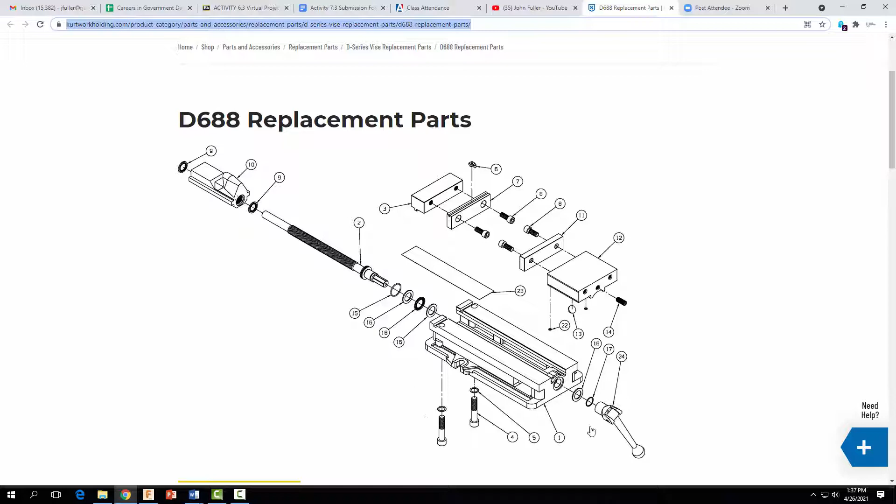Hey everyone, welcome back. In this video tutorial, I'm going to show you how to create an exploded view of the Kurt D688 Vise. If you go to their website, you can see the exploded view of the vise in case you need to order any replacement parts.

Alright, so let's come on back to Fusion 360. Once you have the vise assembly open and you're ready to go, the first thing you want to do is come over to your workspace and change it from design to animation.

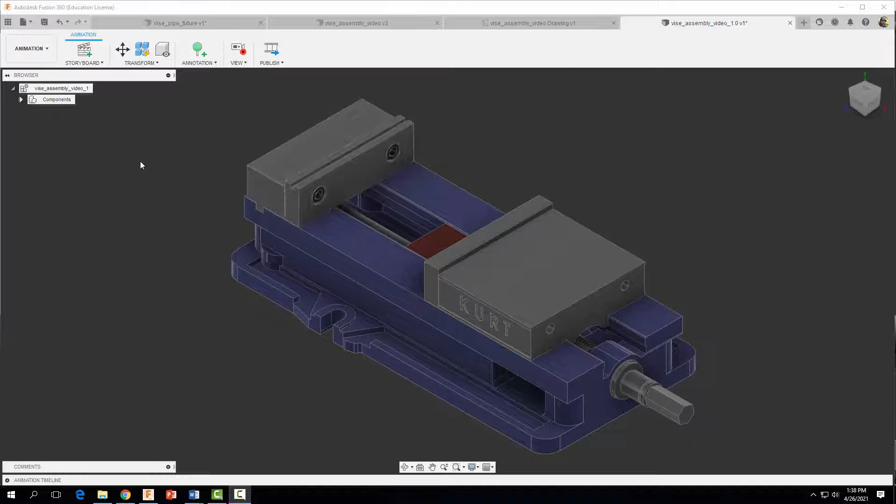The first thing we're going to do is take off the top here of our vise, the jaws, the jaw plate, and the bolts. To do this, I'll hold down Control and click on the two bolts, the jaw plate, and the jaw. I'll click Transform and move it up about 2 inches. Go ahead and select OK.

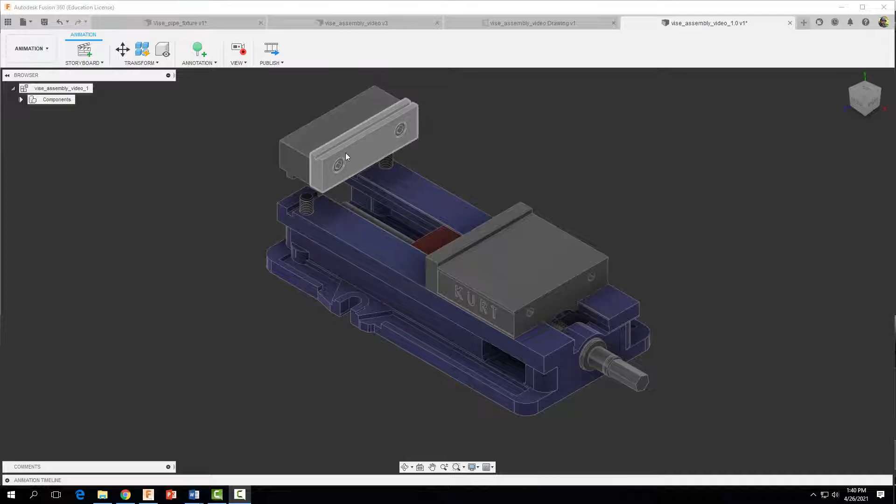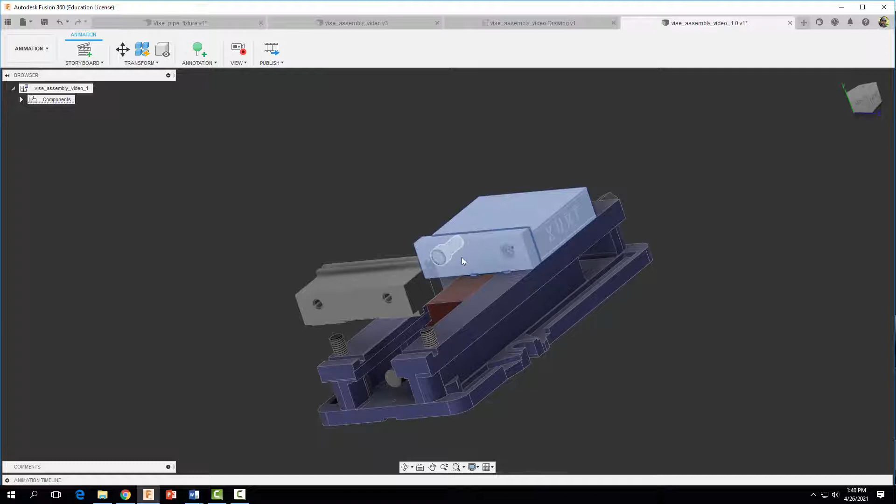Now click on your screen, and let's repeat this process for the movable jaws here on the vise. I'll hold down Control, click there, hold down Shift and my mouse wheel and rotate the part around with my mouse. Press Control and click on those two bolts, then come over to Transform and move this part up 2 inches as well. Type in 2, select OK.

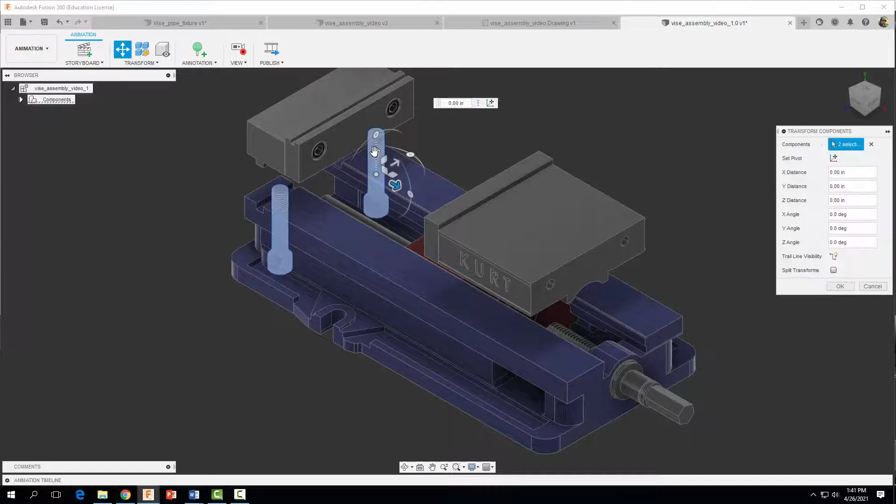Now we're going to take out the two bolts here that hold our fixed jaws in place. I'll hold down Control, click there and click there, then hold down Transform and move them down so that they're out of the vise. I'll make sure they're adequately far enough here, so I'll just type in -4. That should do the trick. Go ahead and select OK.

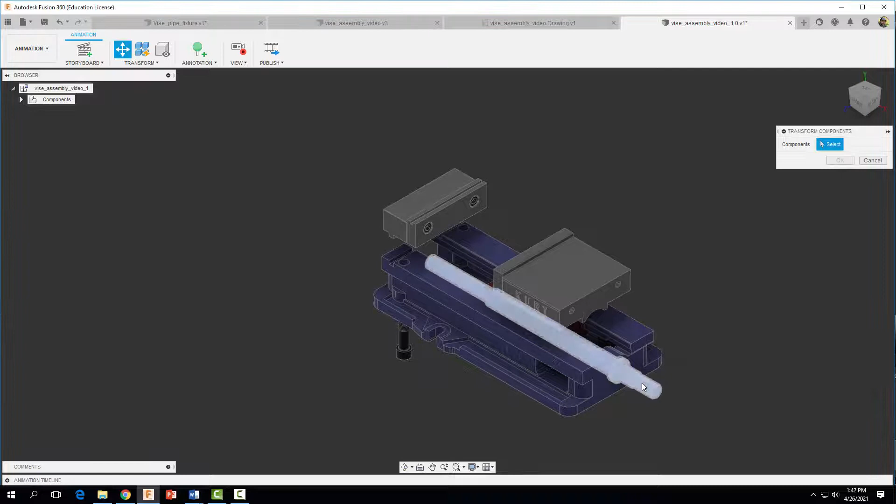Now I'm going to zoom out here and remove the lead screw. I'll click on Transform, click on my lead screw, and pull that guy out a sufficient distance. I think -20 should do the job. Select OK. Let's do the same now for the lead screw nut here, which screws into this, and pull it out. I think -32 inches should do the trick. Go ahead and select OK.

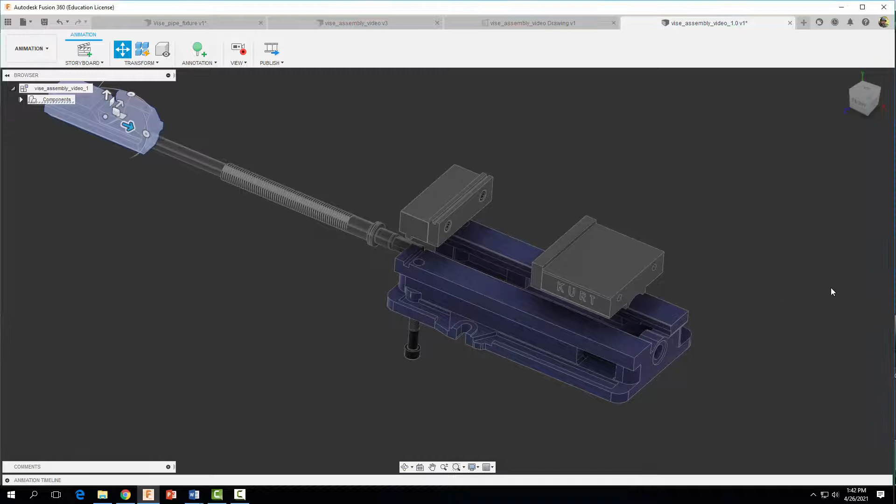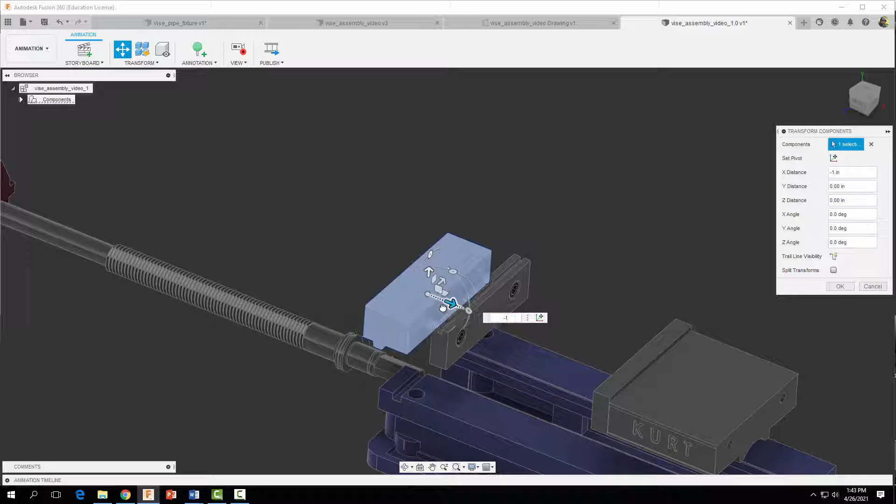Alright, looks pretty good. Now let's go ahead and start taking apart our vise jaws here. I'll do the fixed portion of the jaws first. I'm going to zoom in, click on Transform, click here, and move this guy out a distance of maybe -1, should do the trick. 1 inch. Okay, and I'll do the same for this side. Move it over 1. Click OK.

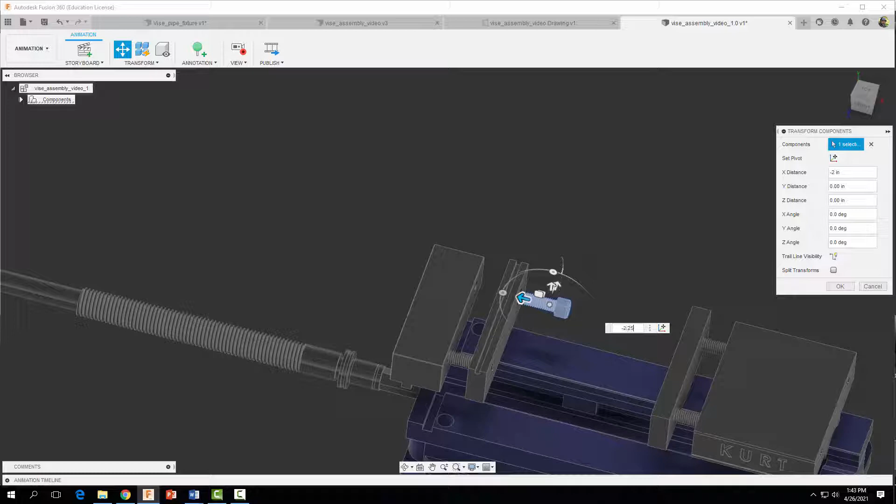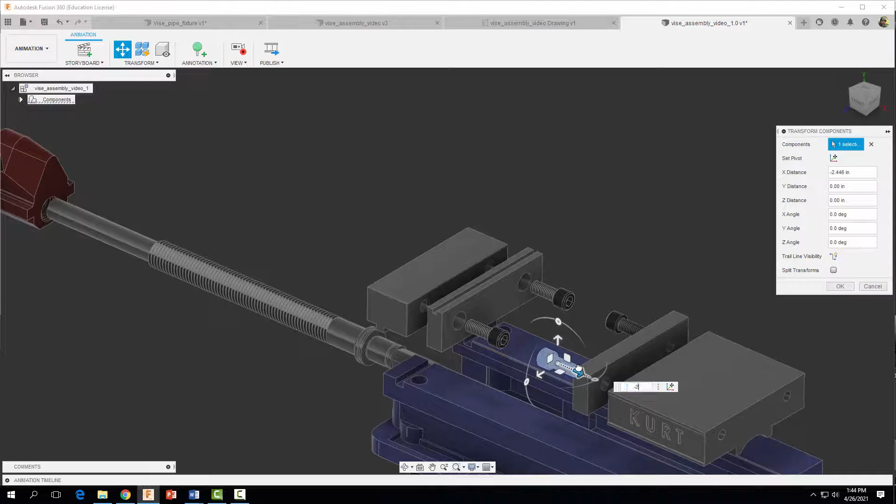Now I'm going to move the bolts out here. Transform, click on that guy, move it out. Let's see if -2 is enough, and let's go with -2.25. Let's do the same for this one. -2.25. Same for this one. -2.25. Click here. And -2.25. Select OK.

And there we have it. Our vise is pretty much completely taken apart.

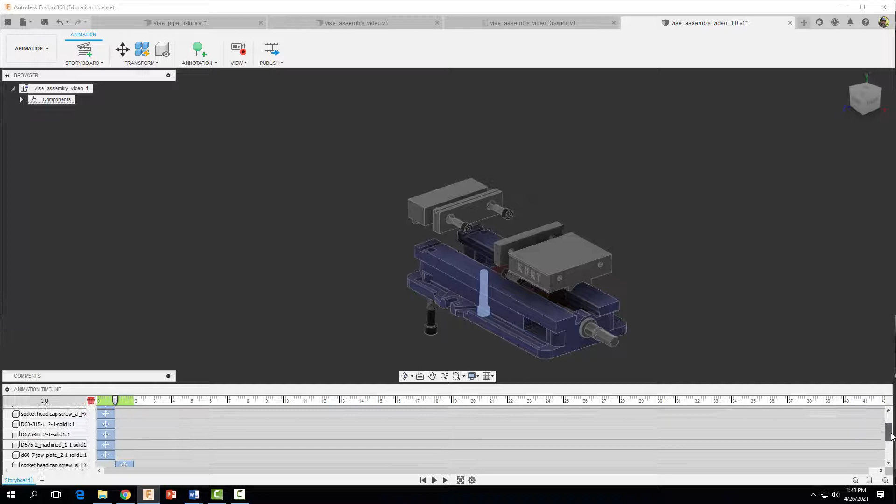Alright, so now that that's done, I'm going to come down here and expand my timeline, and stagger these so we get a nice animation of our vise being taken apart. The first thing I want to do is make it appear like these two bolts down here are taken out first, so these right here and right here. Everything else I'll move out past it. I'll slide up, click here, hold down Control, and click on all of them and move them out here.

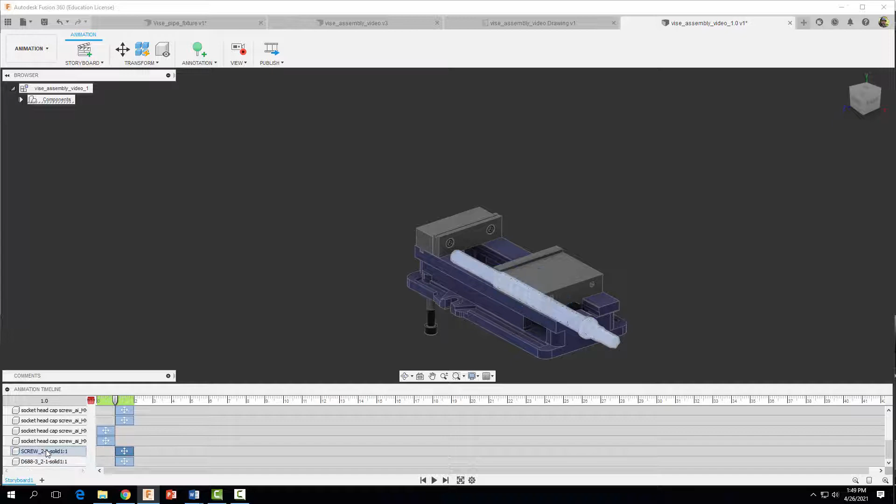Next, I'm going to animate my lead screw and my lead screw nut that's inside of here. So I'll come down and find that part, looks like right here and right there. That's good. I'm going to now move everything else out past there.

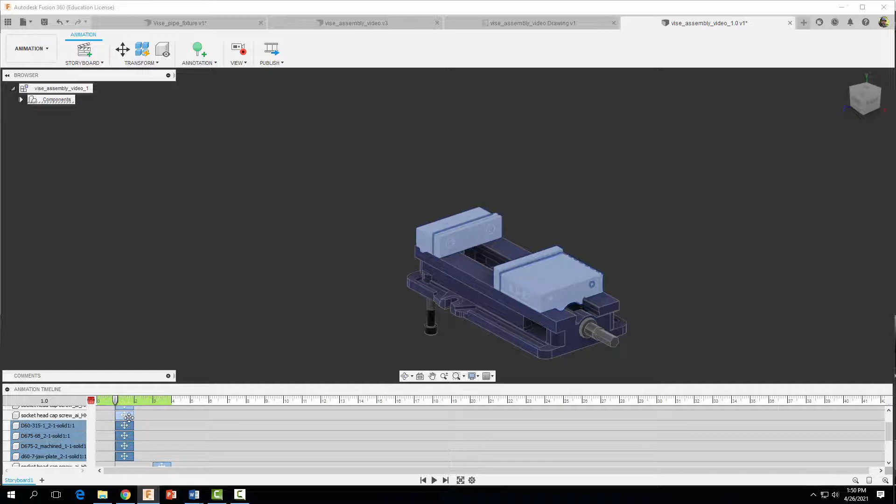Let's do this, and then we'll move everything out past there. Once again, I'll click on Control, move all of them out here. Alright, so now let's go ahead and animate this. I think we did a pretty good job.

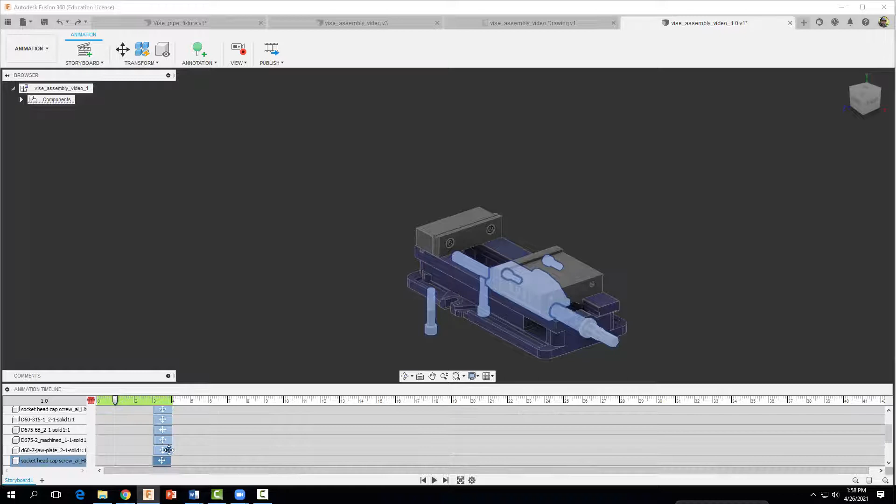However, this zoom feature here, I want that to happen first. So I'll hold down everything, click on everything here, go up, hold down Control, and I want this to be just past the zoom thing there, right there. Okay, I'm going to scroll back up. And now let's go ahead and animate it, hit play.

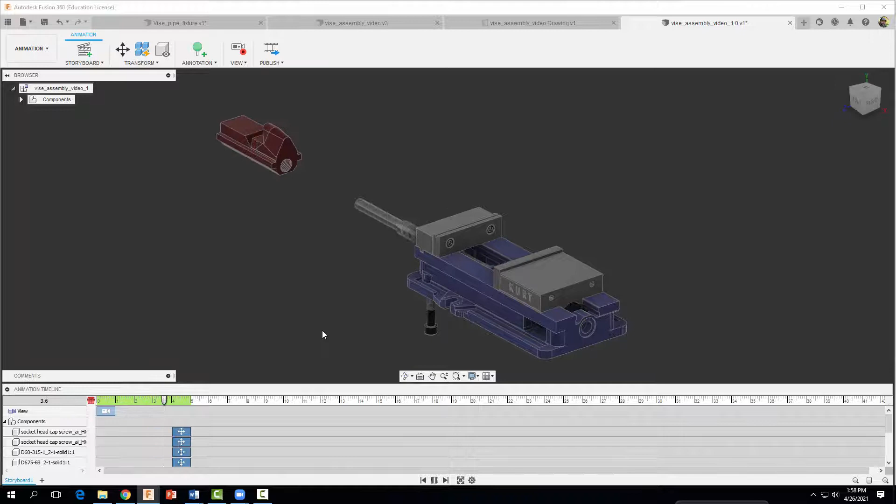All right, so we have a pretty good animation that shows how our vise is taken apart. Feel free to play around with your storyboard and modify it or get as creative as you like.

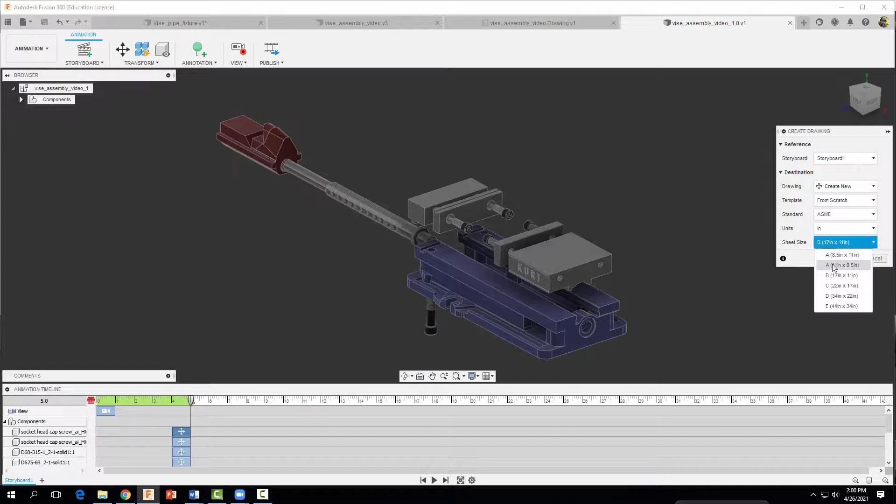I'm going to go ahead now and create an exploded view from this view right here. To do that, I'm going to come up to my workspace, come down to drawing, and select drawing from animation, not from design. I'm going to change my sheet size to A, 11 inches by 8.5 inches, and select OK.

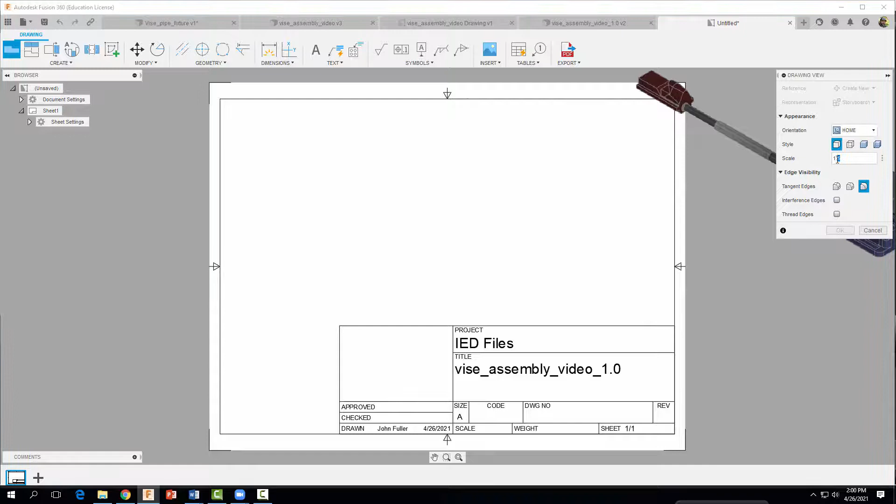I'm going to click in this area right here, but change a couple things. Let's see the scale here. Maybe 1 to 5 - that looks pretty good. Maybe 1 to 4 if we can make it fit. That's pretty big, but let's give it a go. I'm going to give it some shading, and click OK.

And then I'm going to delete them. I'm going to click on my title block here, and delete that guy.

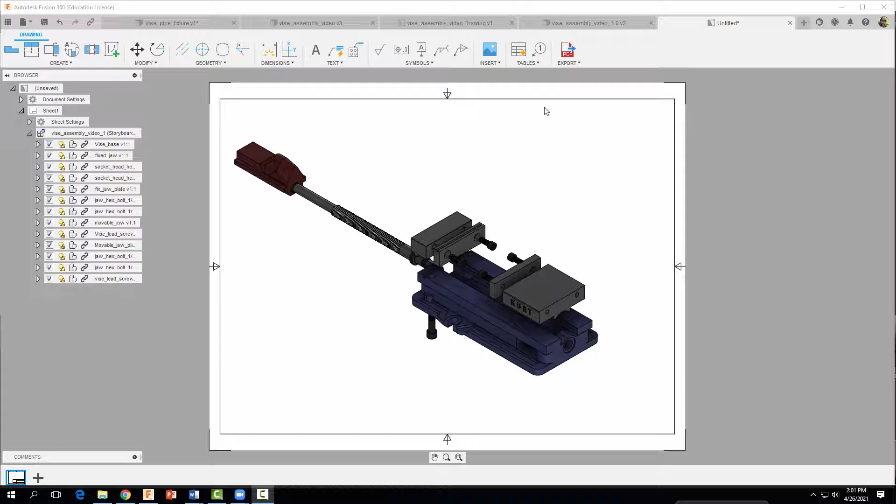All right, next we want to go ahead now and create a table and some balloons for this. So I'm going to come into tables, select table, and drag this corner and snap it right into that top right corner.

So we have this really cool parts list. I'm going to click on it and edit it. If you just double click on it, when it becomes highlighted, you'll get this menu here. I don't want description, so I'm going to uncheck description. I should have item, quantity, part number, and material. I'm going to go ahead and close this guy.

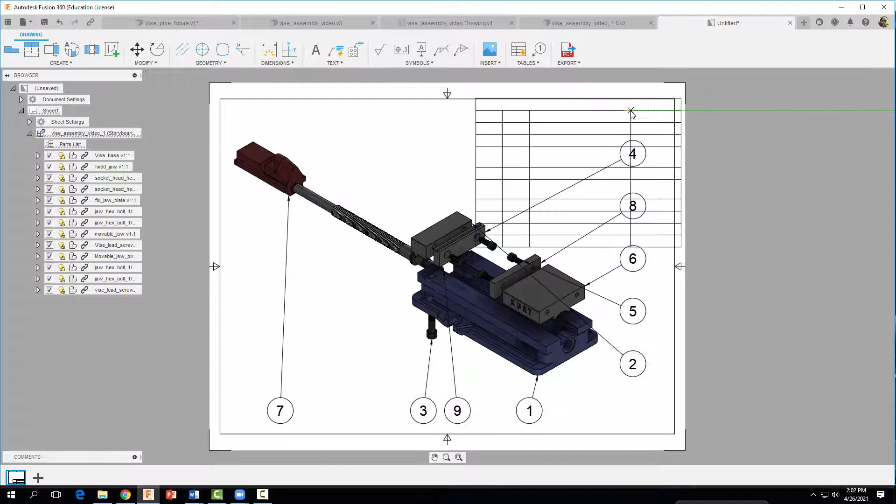I'm going to come back to my table here, and adjust these columns so I can get them as narrow as possible - same with my quantity and my item. I'm going to move that corner back there. All right, that looks pretty good.

Now let's go ahead and move our vise over a bit so we're out of the way of our parts list. Okay, that looks pretty good.

All right, so now let's go ahead and move our balloons here so everything looks nice and aligned and parallel. So these lines, these three lines look pretty good in parallel right here. I'm going to start here and just move this guy in.

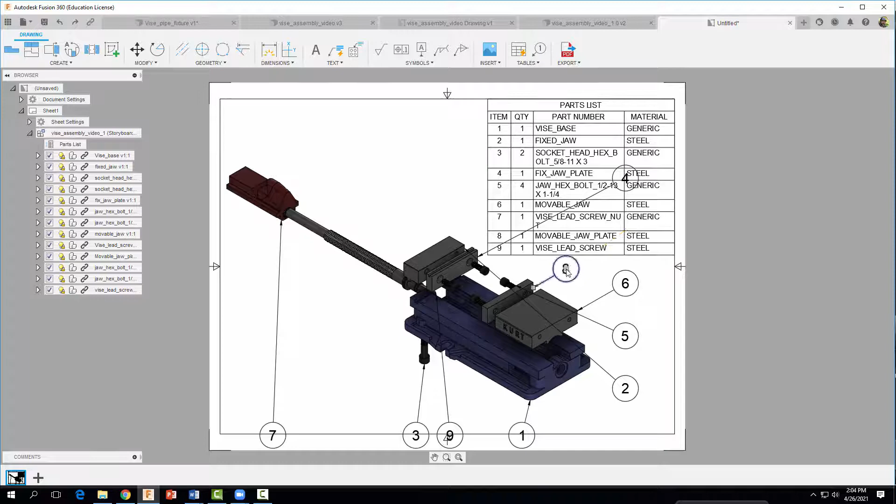Okay, and this number 4 - let's get this number 2. Let's drag it over here. And let's see here, I'm dragging this number 7.

All right, I'm going to click on this 4 here, and move it over here because it's kind of off. And then this side of the arrow, I'm going to move it to here, and once again, kind of make it nice and parallel.

And I'm going to move this guy up here on my lead screw. Already starting to look quite a bit better.

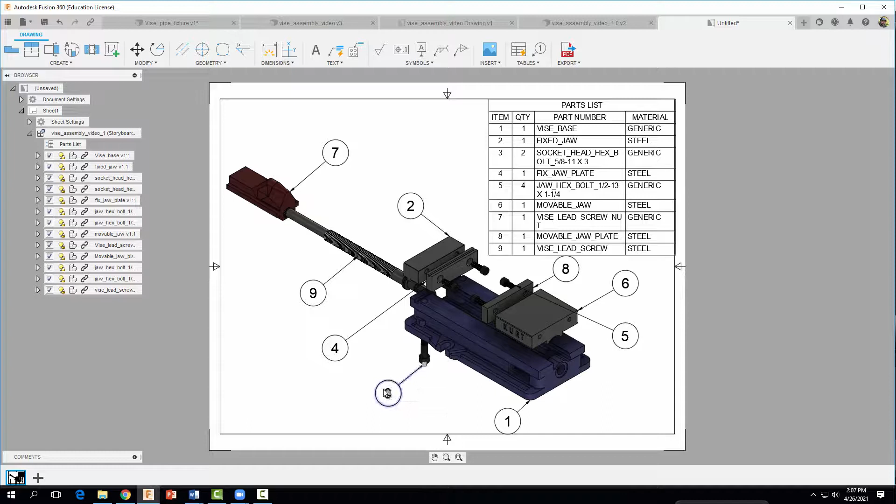Okay, and this number 5, let's see here - I think it would be better over here on this bolt right here. We're going to attach it to a different bolt. There we go.

All right, and to stay consistent, I'm actually going to move this 2 down here. Let's see, they all look pretty parallel. Okay, so that looks pretty good. You could spend some more time getting it just perfect.

I'm going to go ahead now and bring in an actual assembly image of our vise. So I'm going to come over to base view, and by default it's going to bring in a front view. I'm going to change the front here to northeast isometric. Okay, so it's kind of in the same orientation as my exploded view.

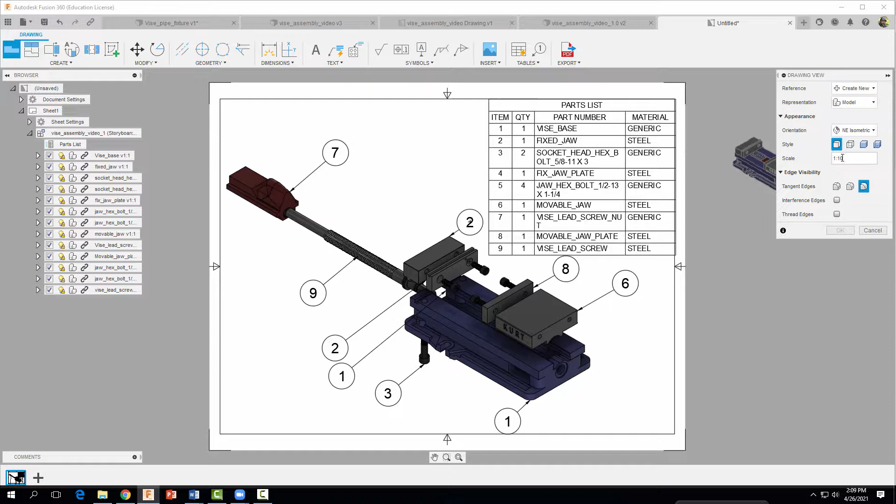However, I'm going to change the scale. Let's make it - let's see what 1 to 8 does here, or 1 to 7. And we can maybe go a little bigger - 1 to 6, looks pretty good. I'm going to give it some shading just like the other one, and I'm going to click here and select OK.